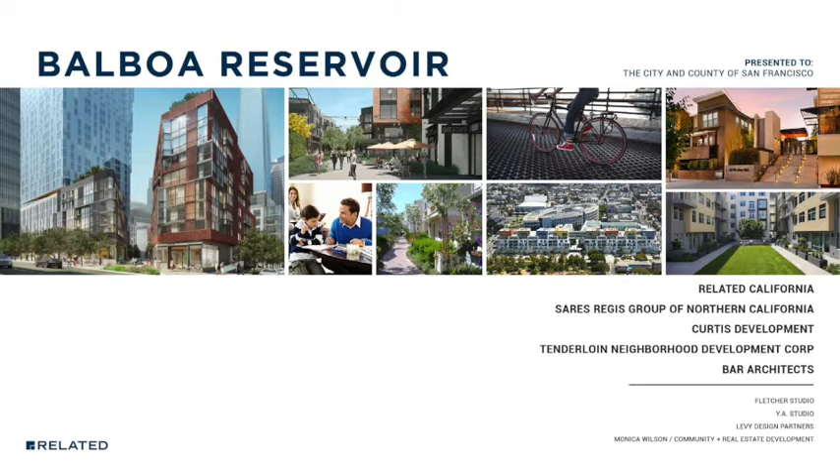Let me briefly introduce our team, all of whom are here. Sares Regis Group of Northern California, one of the Bay Area's largest and most successful developers of for-sale and multifamily infill housing. Curtis Development, Charmaine Curtis, until recently a Sunnyside resident, longtime San Francisco developer and planner of urban neighborhood communities. TNDC, one of the city's most successful nonprofits with a citywide portfolio, who is our partner on 3 other mixed income developments in San Francisco.

Our design team, all San Francisco based, led by BAR Architects, the master planner and lead architect, Levy Design Partners and YA Studio, and Monica Wilson, with whom we have worked very successfully on other developments in San Francisco on local hiring and minority business enterprise development. We all work together. We're not new to each other.

But a little bit of history first. In the 80s, I was Mayor Feinstein's Director of Housing and Economic Development, and then briefly Mayor Agnos' Deputy Mayor for Housing. And as some of you may recall, there were 3 ballot measures on this site way back then to develop. 2 of them failed. The lesson I took from that is, if you don't have the support of the neighborhood and stakeholders, such as City College, you're going to fail, however noble the objective.

So to that end, I commend the Community Advisory Board that worked with the city over the last 2 years to try to arrive at a consensus to accomplish multiple public policy objectives. What are our objectives here? A family-friendly community, not just buildings, that complements and integrates with the neighborhood. Quality affordable housing that is distributed across the whole site, not sequestered in individual buildings, and that is physically indistinguishable from the market rate housing.

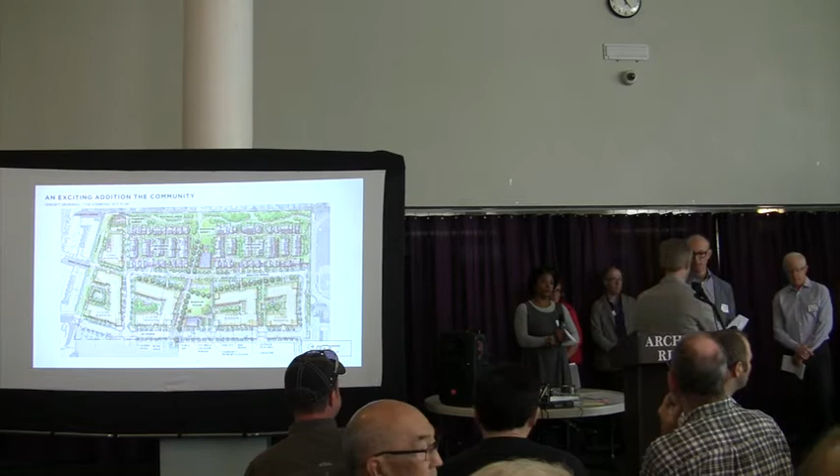To reiterate something Bill said, a great plan will really come from collaboration with you, the community, and all the stakeholders. But what we put forward today, we're quite proud of, and it's the result of a very creative core team whose master plan you're seeing.

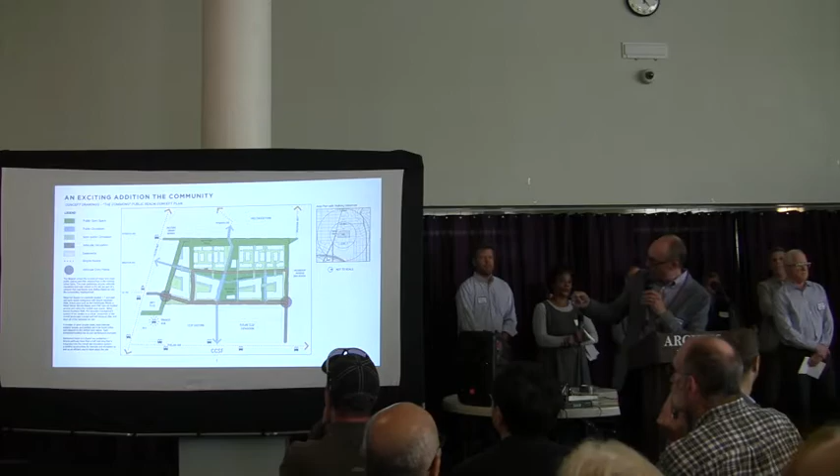Can you go back to the previous slide? Thank you. One thing to note, and I'll be brief about this, is about 6 acres, or a third of the site, is set aside as open space. The open space isn't cloistered in the core where neighbors would have to walk through buildings to get to it—it's spread throughout the site in three primary areas.

In essence, what we've done is create an open space network that represents the intersection between nature and public life. Water is crucial to the history and symbolic meaning of the site, and will continue to be so in the future.

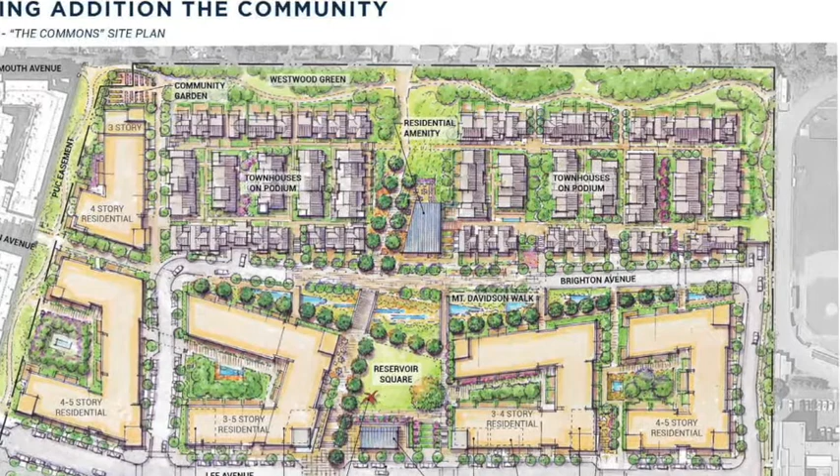The SFPUC near Ocean easement would combine with what we're calling the Westwood Green. The existing berm would be regraded down and made usable, but the buffer it currently presents would continue to live on in the form of a forest—a kind of charm bracelet of activities and uses arrayed along it, including informal recreation, community gardens, and a dog area.

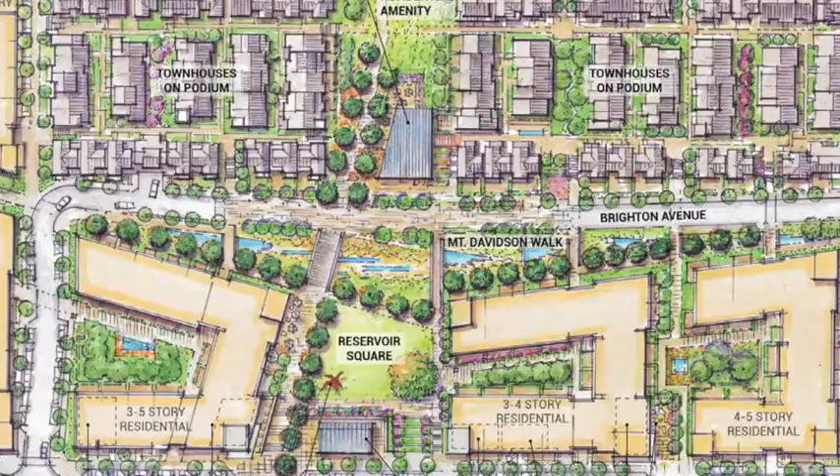Going down to Brighton Avenue, there's another space we see not as a street but as a large urban plaza—a curbless street on Brighton. Below it would be a core stormwater area that receives and celebrates water as it celebrates life, offering a public open space that's a little informal, a little wild, transitioning up to the Westwood Green to the north.

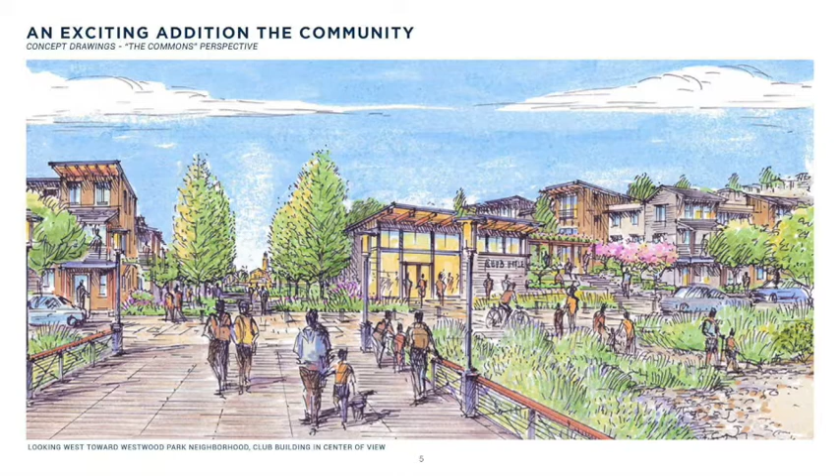Then the Reservoir Square would be below that, serving as an active open space for the community where community meetings would occur, possibly farmers markets and other uses where everybody would come together.

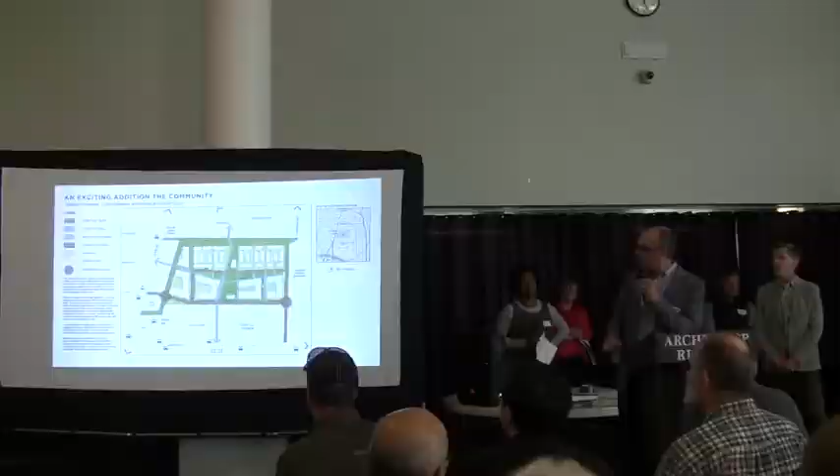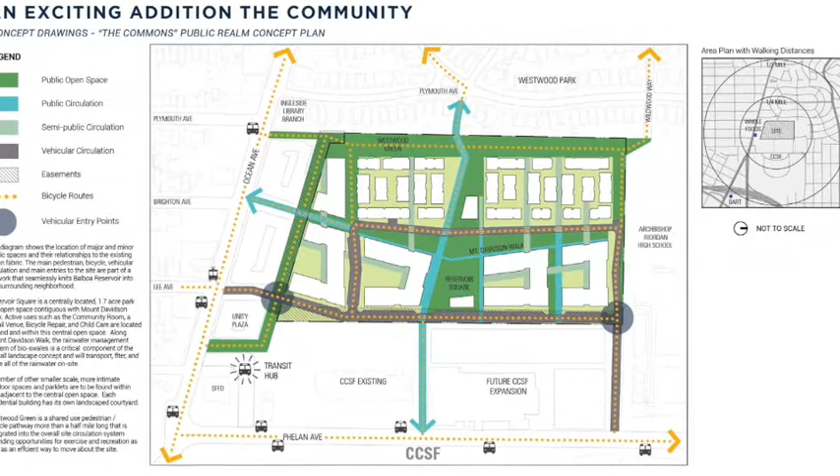This slide distills the network we created: the buffer zone shown as the Westwood Green running east-west along the SFPUC on the other side. It also shows over a half mile of pedestrian and bicycle trail networks, and a vehicular loop surrounding the central space, the internal buffer of the Mount Davidson Walk. A subtle detail is that the roads aren't just straight—they're tuned at hinge points, offering an informal edge where nature blurs the boundaries and knits everything together through the site.

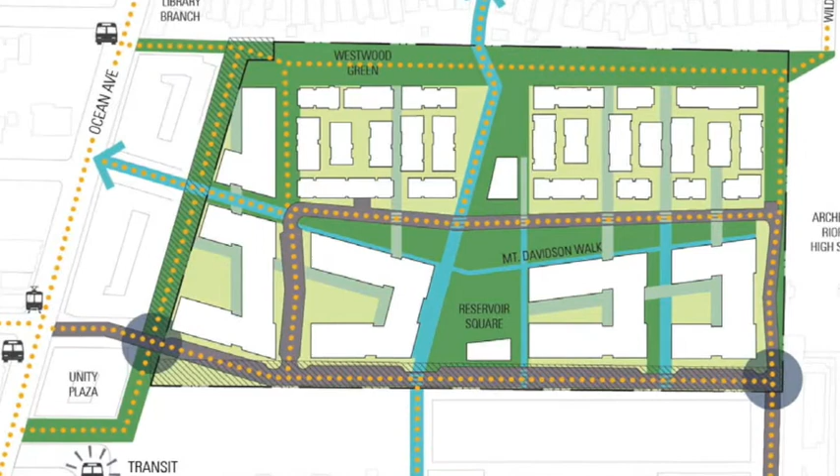Just going to talk real quickly about the buildings a little bit.

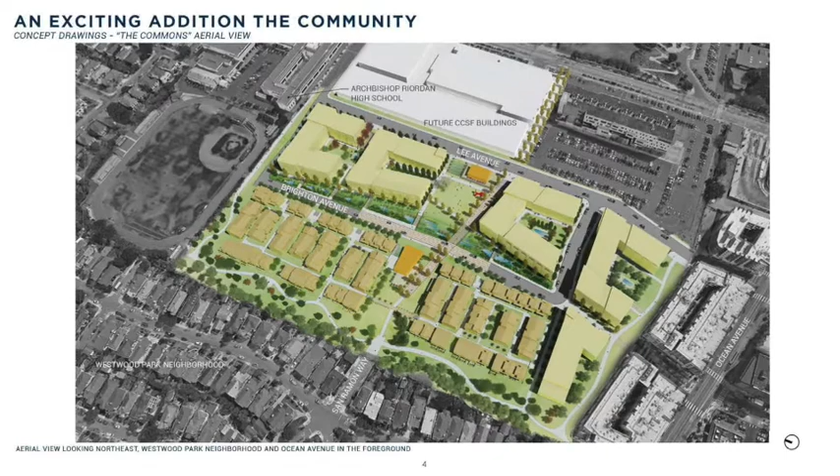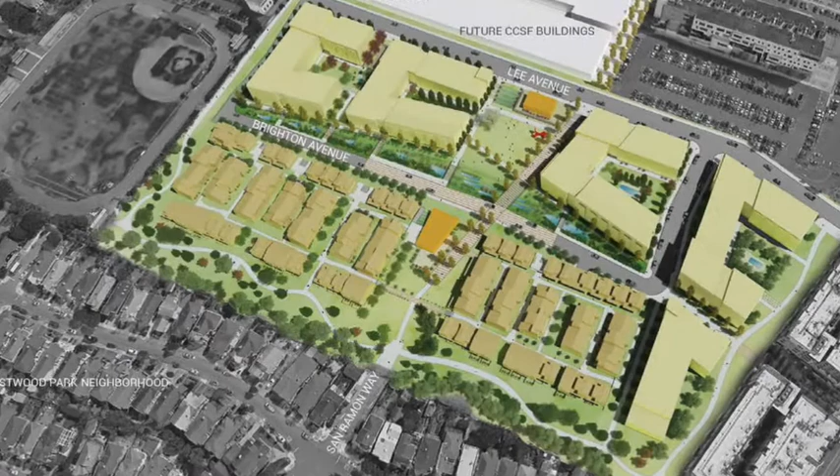One of the key features on the western edge of the site is that a good portion is made up of 2- and 3-story townhomes. Those townhomes sit on top of 2 fairly large underground parking structures that provide parking for the entire site, including the multifamily buildings along Lee. By putting the parking underground and wrapping them with units, it creates a wonderful space at the townhomes that's devoid of cars, a great kid-friendly space and pedestrian zone.

The buildings towards City College to the east are a series of 3- to 5-story buildings with semi-public landscape courtyards. They're on grade because there's no parking below them, and they're connected by a series of pedestrian pathways. All of the units facing the street or open space have front stoops, which help create activity, eyes on the street, and better safety in the neighborhood.

As a quick overview of the plan, we're just getting started. We think we've got some great ideas on the overall framework, and the design team looks forward to working with all of you in the future.

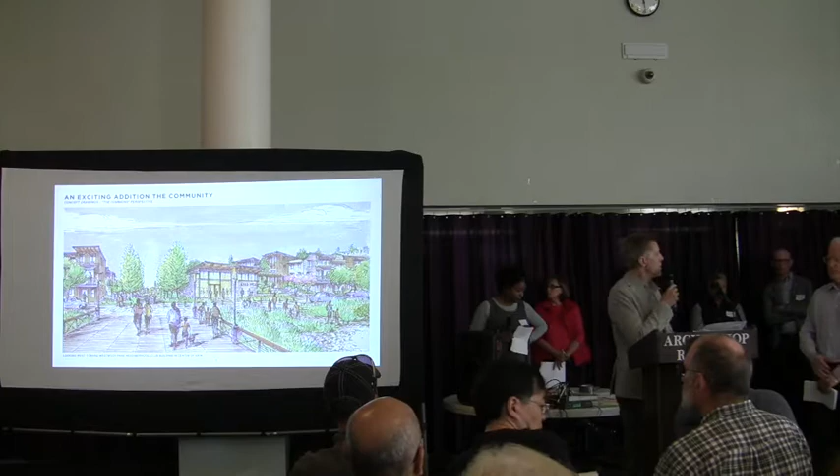Let me quickly walk you through the particulars of the development program. There's a lot of information here, and we can't deal with it all in this short time, but let me summarize. We have a total of 680 residences.

We did not preordain a number. We let the plan yield the number. A third of the site, as Chris said, is open space.

186 of the units are for-sale housing: 120 in 2- and 3-story townhouses, 66 in taller buildings. Those are affordable for-sale, and 120 are market rate. There are 494 rental units: 219 market rate, 275 affordable, but again the affordable is integrated into all of those buildings.

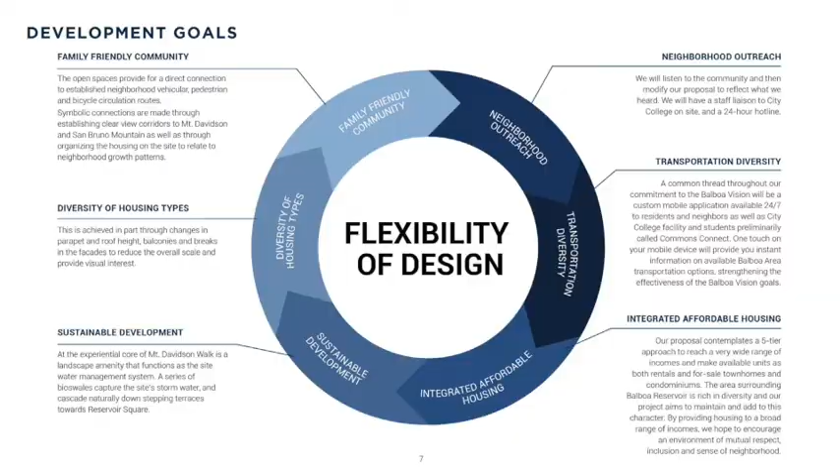We're going to err on the side of over-communication with you. Hopefully you won't get sick of hearing from us, but we'd rather annoy you with too much than too little. And last, respectful, honest communications. That's the fundamental basis for building trust, and that's our main goal: to have a trusting and respectful relationship with all of you to get to a plan that's great for this community.

So, Bill, you want to wrap up? Let me just say, we typically don't sell our developments. We are long-term owners, so we become neighbors in the community. So we're looking here not to build a project, but to join your community.

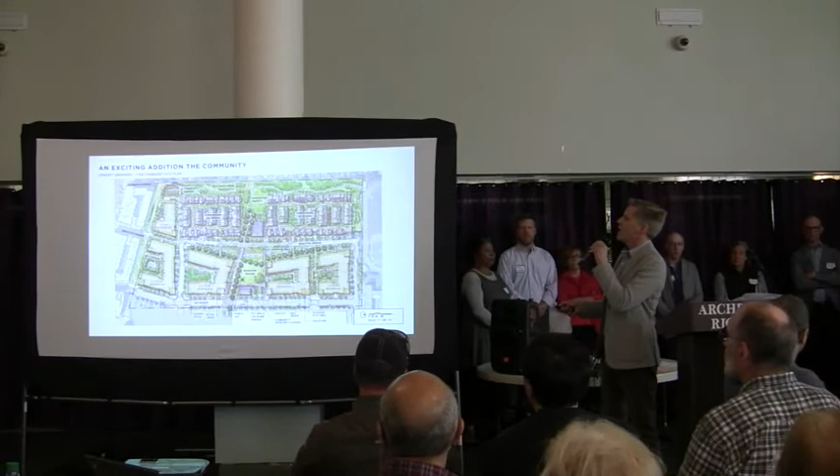So we're proposing to have somebody, there we go. Okay, so the parking is all located in a garage that is underground here and here, and there are approximately 380 parking spaces in those two garages. Access would be coming off of this new Brighton Avenue along there. It's exactly half the number of units, about 0.6 spaces per unit, correct?

Okay, another question while we have that up is about the total acreage devoted to open space. Maybe you can quickly address that one. There are, I believe, 5.8 acres, as Chris and David walked through, devoted to public open space. So that's about a third of the site.

And there was a question about the height of buildings along the City College side, and there was a concern that maybe from a community design standpoint, City College would be walled off from the development. Was that the intent? How are you handling that interface? I think the question proposer was also concerned about the idea of partnering with City College, so they didn't want to create a barrier along that edge.

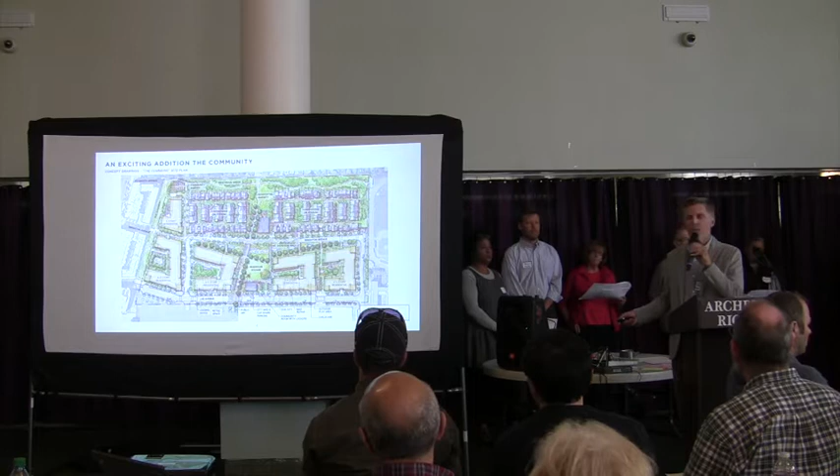So the buildings we're proposing along City College, there are 4 buildings here, relatively small buildings. Each would have maybe 80 to 100 units. This site will still step from the high point along Lee Avenue. It slopes this way and this way. So along the edge of Lee, the buildings will be somewhere in the 3 to 4 story range. Then, as the hillside steps down, the buildings step down 1 or 2 stories. Overall, 3 to 5 stories is the height anticipated through these buildings. But they're quite small blocks, smaller than a typical city block. There's also a fair amount of, for lack of a better word, porosity, because with smaller buildings there are a lot of openings, including in that central public space corridor.

So the next question had to do with affordable housing. Is there a time period for the ownership by which it will remain affordable, and how will you guarantee affordability over the long term? One minute left for questions.

With respect to the time period for affordability, it's an easy answer on the rental side. There is a long tradition that we and others have participated in on rental housing of establishing a legal long-term covenant which is effectively permanent. It's usually 55 years, but it can be more, so that the rental units sprinkled among our developments carry that covenant—they will always be affordable. On the for-sale side, there is a tradition, which we actually started when I was with the city in the 80s, of carrying resale restrictions on affordable units, so the first buyer doesn't get a windfall when they sell. That's how we would do that.

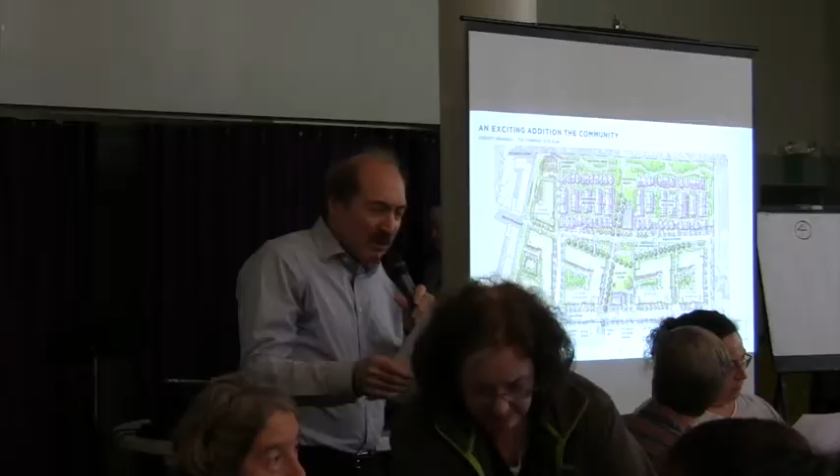So the question has to do with the interface between the development and Sunnyside and the other West Side neighbors. We want to make sure there's an understanding of how traffic circulation works in that respect. Where are the car access points in and out of the development? That ties in with that question.

Back on the questions related to housing: do we have rental or ownership housing, or some combination? What's the mix between condo units and rental units, and between condo and rental with respect to affordable housing? And finally, is there retail space included in the development? I'll give this set of questions to Bill, and you can manage the 5-minute time accordingly.

So Bill, take it away. So the first question dealt with the interface with the neighborhood and Sunnyside in particular. Chris, why don't you refer to the plan?

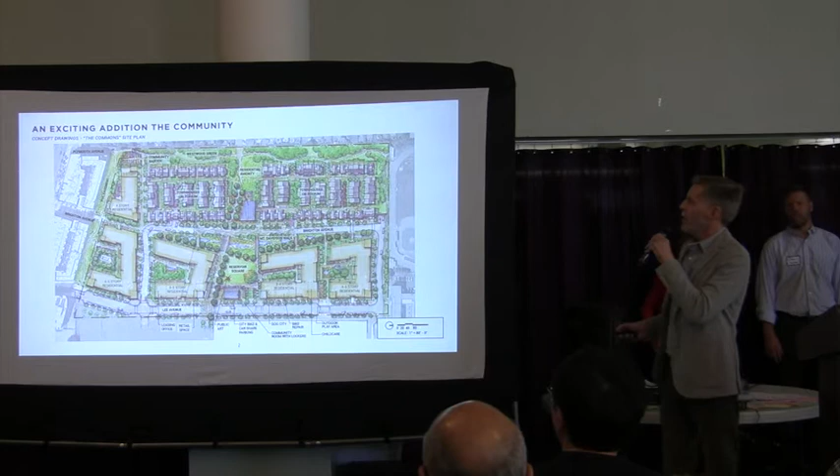Okay, I'll walk everybody through the vehicular, pedestrian, and bike access. Just to orient everybody, this is City College. North is to the right, the high school here, and the Westwood neighborhood here.

We anticipate cars coming in off of Lee Avenue, which crosses Ocean, and would come into the site along this eastern edge. We're creating a small loop road through the site. So you'd come in just the way you do now off of Phelan down here, and cars could come around here.

You would enter the garage we mentioned earlier along this new Brighton Avenue at 2 points. There would be no vehicles penetrating into the neighborhood to the west. Brighton Avenue, which comes in off of Ocean, will not go through for vehicles, so that would just be pedestrian and bikes. And up here at Plymouth, again no vehicles, but potentially bicycles and pedestrians.

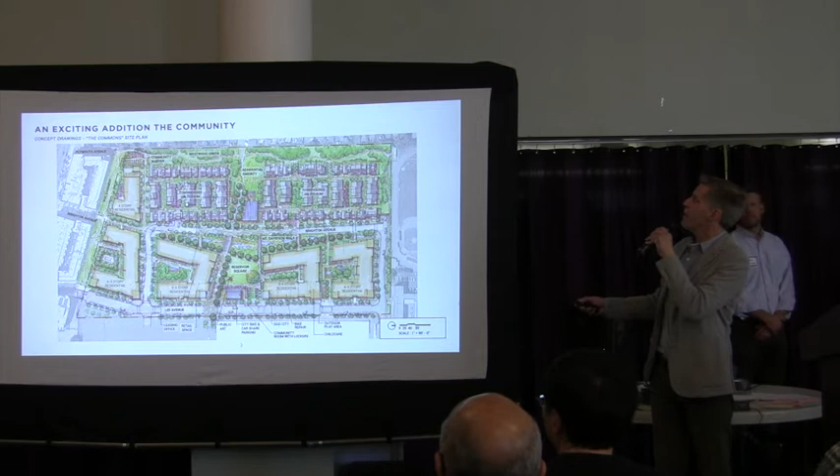We anticipate keeping this connection here that goes into the neighborhood as a bike and pedestrian access only, and potentially an opportunity for connection here along the northwest corner.

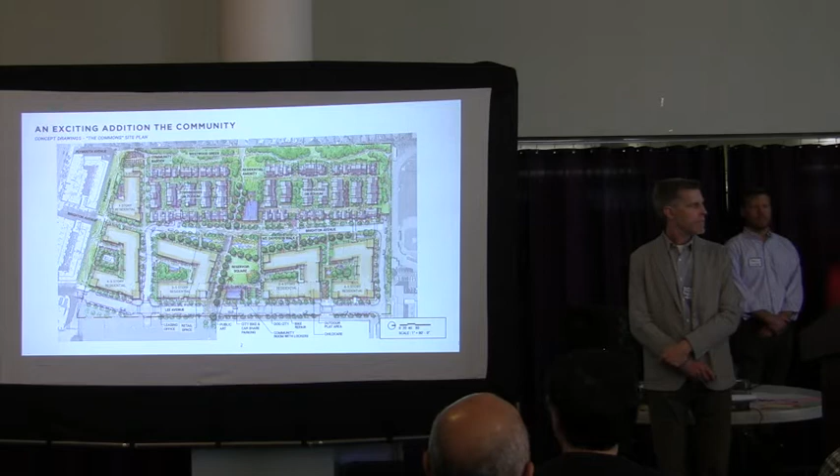How would you get out in an emergency? Let me add one thing: I know there have been a lot of questions we've gotten in the interim about access. This is a first shot. The key thing for us was no vehicular access, but there are other ways access can be controlled as well. As we said, we haven't had the chance to go out to real community meetings. This is our attempt to respond to what we heard in terms of goals.

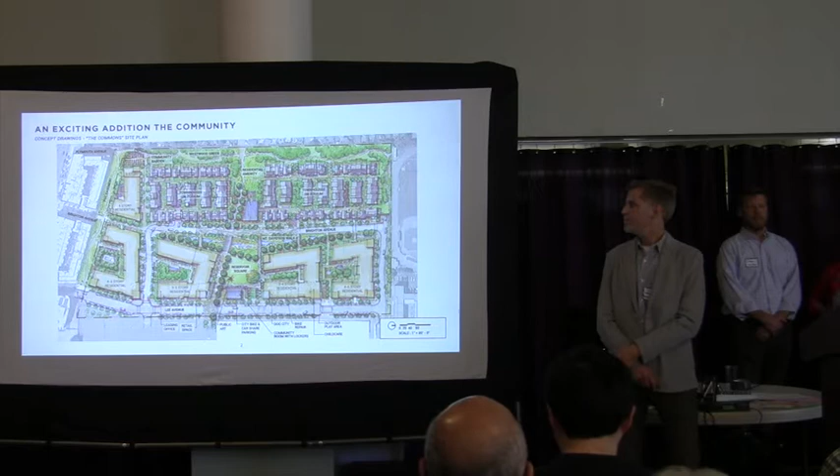Well, the city has very specific guidelines about that. Affordable for sale at those income levels are homes or condos selling for in the $550,000 range. Now, that used to be a lot, but in today's hyperinflated world, that is way, way below the market, which might be 3 times that at this location.

On the rental side, there are 494 rental units, slightly more affordable. 219 of those are market rate, 275 are affordable, and affordable units will be distributed throughout the rental buildings - they will not just be in one building.

Do we have retail space? We do not at the moment have retail space, just as a proposal. There are a few reasons for that. One, we're proximate to Ocean Avenue, which is where retail space in this community has typically been. Number 2, if we have retail space within the development, it adds to parking questions. And number 3, at an economic level, what I might call interior retail usually doesn't work very well because of limited access, et cetera. It doesn't mean we couldn't - the plan just doesn't currently have it.